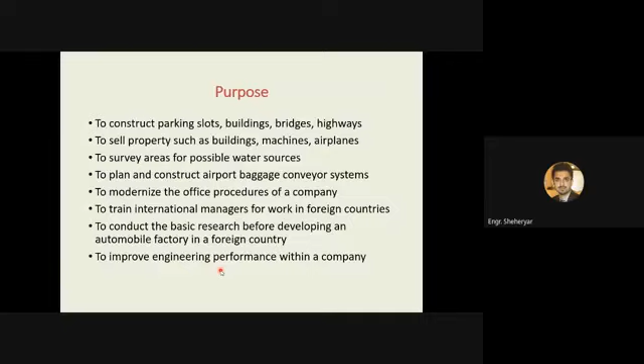Is Majid Yasir a foreigner or Pakistani? Is anyone here or not? Yes sir, yes sir. I have a question, are you in the university? No, I'm not in the university. I'm asking if Majid Yasir is a foreigner or local student. Yeah, yes, he's a foreigner. Okay, please tell him to join the class with university official ID. Okay.

So, is there any question till this point? No, sir, because I just joined now, I have no internet in hostel, okay, university. Okay, so we are talking about the technical proposals.

We have just introduced into the topic. I'm asking about the importance of a proposal for a company. So Ahmed Mohammed, do you know anything or have any idea why a technical proposal is important for a company or an organization?

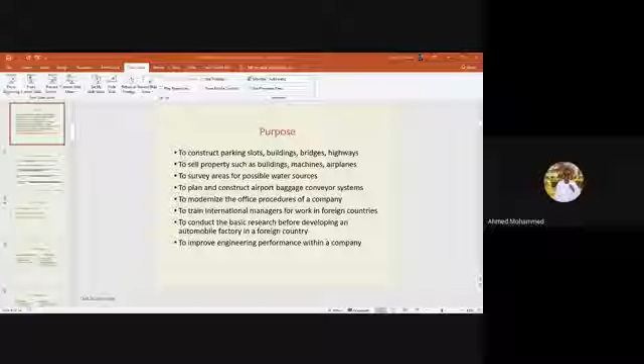Technical proposal for a project or something like that? Yes. Yes, it's very important because if the company wants to do a proposal for any project, it gives the funds - if there is an organization funding that project, the proposal can give a clear idea about what will go, what will be, and how it will be.

Yes, good. Anyone else? Yes sir, please. Sir, I think it's a basic step for approving anything or any idea that we are proposing in front of the companies, etc. So it's an important step, I think.

Yes, exactly. And it will lead either to rejection of the proposal, or it will lead to acceptance of the proposal. In both cases, it is beneficial for our company. If it is rejected, you can learn from your mistakes, and if it is accepted, it will earn money for your company.

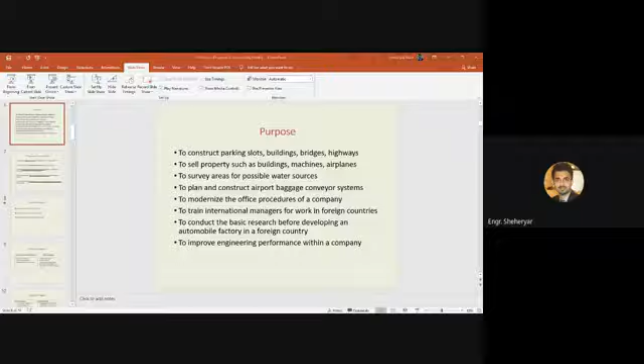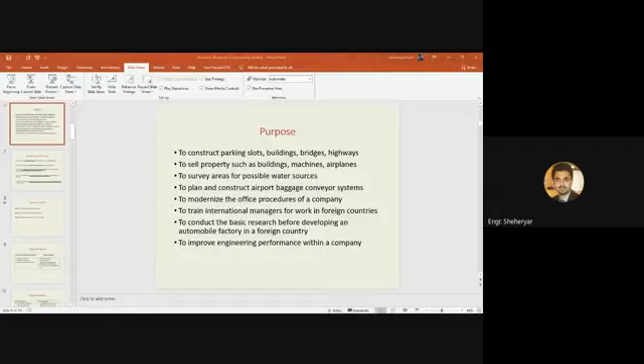A successful proposal - there's a quote that says a successful proposal is the difference between working on a project or looking for another job. So if your proposal is successful, you'll be working on that project, or if your proposal is rejected, you'll be looking for another job.

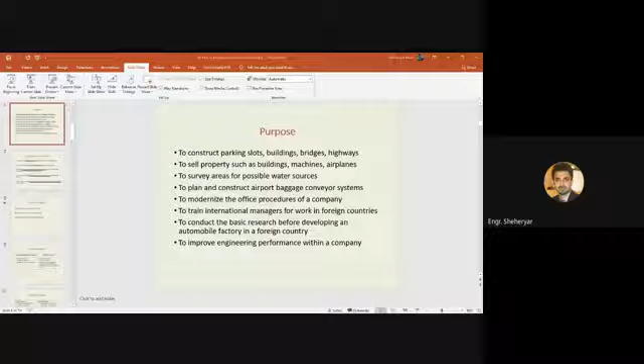When you write a technical proposal, for example, if there is a project announced for construction of a canal system, your company is trying to apply for that project, and for this purpose they are writing a proposal. So, what will be the steps of writing a proposal?

They cannot directly sit down and write a proposal saying we want to do this project, and complete the proposal within a day or two. You have to do some surveys. You have to do some research activities. You have to find out how the canal systems are built.

If you have not done a similar project in the past, you have to search out the procedure, search out for the materials required, search out the rates of the materials which will be used in construction. You have to find out local labor cost, labor skills required, machinery required, and so on. The list is endless.

सर, ये केस अगर आप देखें तो नीचे वाली स्लैब का एरिया ज्यादा है और ऊपर वाले का कम है. तो इस सिचुएशन में अगर फील्ड में ये प्रोजेक्ट हमारे पास आ जाए तो हम इस केस में क्या करें, क्योंकि ऊपर वाली स्लैब छोटी है नीचे वाली बड़ी है.

ऊपर वाली को सपोर्ट भी तो ऐसे ही करेंगे ना, या इसका कोई अल्टरनेट मेथड है सपोर्ट करने का? नहीं, तो इसका जो स्ट्रक्चर डिजाइनर था उसने गलती की है. जो स्ट्रक्चर डिजाइनर था, ये कॉलम इधर आते ही नहीं, ऊपर वाले स्लैब को बड़ा कर दे, क्या हो जाएगा? सर वो आर्किटेक्चर, वो टेरिस नीचे देना हो तो फिर

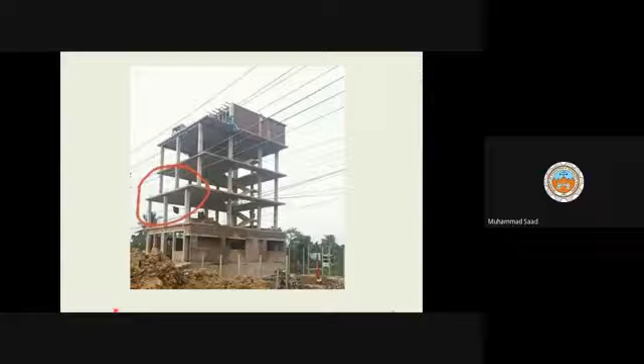टेरेस नीचे देना हो तो फिर आप ये कर सकते हैं कि इसके नीचे एटलीस्ट बीम तो प्रोवाइड कर देते, जहाँ पे स्लैब रेस्ट कर रहा है, कॉलम जिस स्लैब के ऊपर रेस्ट कर रहा है, ये जगह, इसको हम अगर कॉलम के ऊपर कॉलम देकर, आर्किटेक्चरल पर्पस के लिए बीम रख देते फिर भी डिजाइन आ सकता था सर।

तो मैं यही कह रहा हूँ कि यहाँ से यहाँ तक अगर बीम दे देते, properly designed beam for this load, then it was okay. सर बीम की जरूरत नहीं थी, जो 3 कॉलम्स बाहर हैं उनको इनसाइड कर लेते, सिर्फ बाहर का ओवरहैंगिंग पोर्शन। वो पिछला जो क्वेश्चन था वो कह रहा था कि we have to stick with this shape कि यहाँ से स्ट्रक्चर पीछे चला जाए।

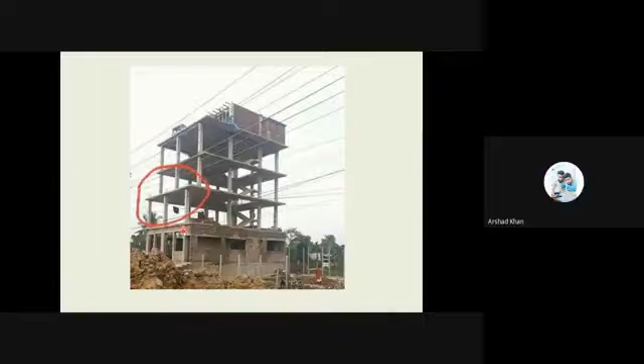Otherwise that was the simplest solution कि आप इन सबको एक लाइन में ले आए, इसको बाहर ले आए इसको पीछे ले जाए। सर ने बीम नहीं प्रोवाइड किया ना, जो सबसे बड़ी गलती की। बीम होते तो फिर ठीक था। बिल्कुल।

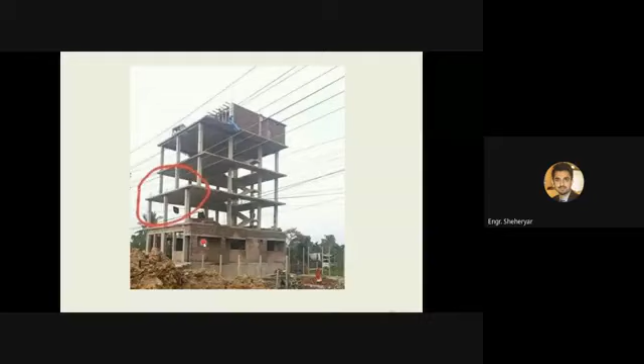What is this? AutoCAD पढ़ा है सब में?

यस सर। Ahmed, Mohammed, can you point out the issue with this slab? रिवीजन क्लाउड को भी स्लैब में उन्होंने पुट कर दिया। Ahmed, yeah Mohammed, there is an opening within the slab, so it is affecting transmission of the load, there is an opening within the slab.

Okay, yes, there is an opening within the slab, but look at this drawing and then look at this opening. What does this bubble-shaped line mean?

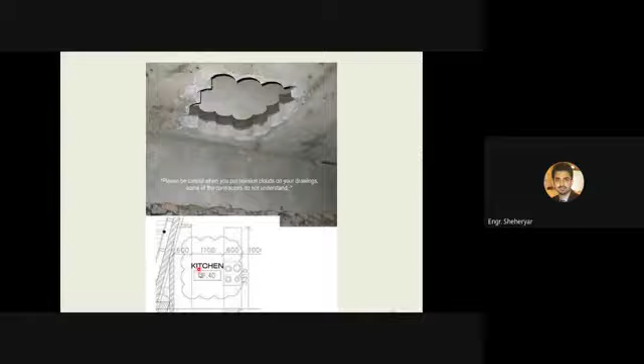Actually, it is not something like a revision cloud. It is a revision cloud. It is a symbolic line. The designer may have had any issue with this text or their dimensions, and he highlighted this portion to indicate that you have to revise these dimensions or this area. So therefore this thing is present here.

But the site engineer, they have constructed this exactly same thing in the slab. So this was the mistake. By the way, it is looking good, sir.

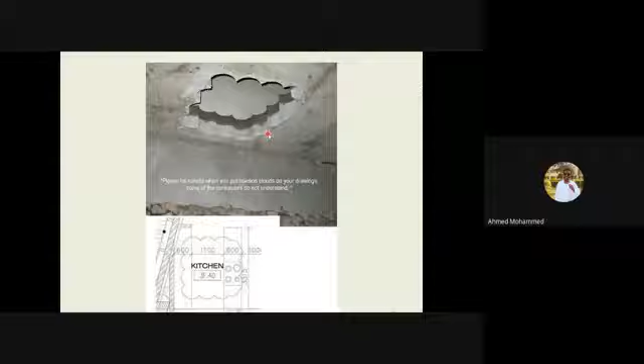हाँ, लेकिन अगर ऊपर किराए का घर हो नीचे आपका घर हो तो फिर अच्छा होगा, और भी अच्छा होगा। That's real or just made for understanding? No, that is real, that is real. सलाम दुआ तो करेंगे ना सर ऊपर। हाँ सलाम दुआ करेंगे।

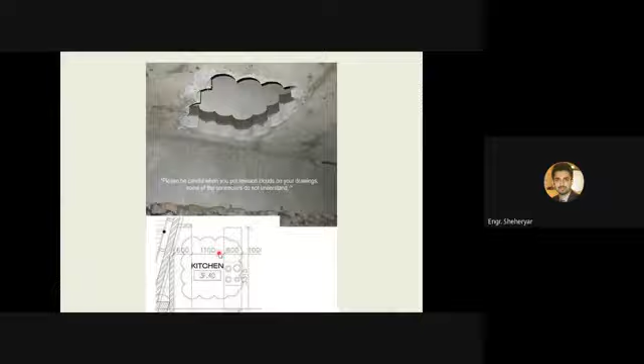अच्छा, now let's get back to the topic. I will discuss the elements of structure. So as we all know, one size cannot be fitted on all. आपका एक बंदे का सूट जो है दूसरे बंदे पे नहीं आता, एक साइज सब पे फिट नहीं होता. Single size doesn't fit all the people. So same is the case here. A single style of writing proposal doesn't fit with all type of proposals.

Some will need additional headings for providing the details required for that specific project. So each type of project will involve different types of headings in writing the proposal. So what are the main headings of writing a proposal? The main headings can be divided into three parts: prefatory parts, body of proposal, and supplementary parts.

There are basic three parts of a proposal document. Number one is the prefatory part, second one is the body of proposal, and third one is the supplementary parts. Each of them have their sub parts as well.

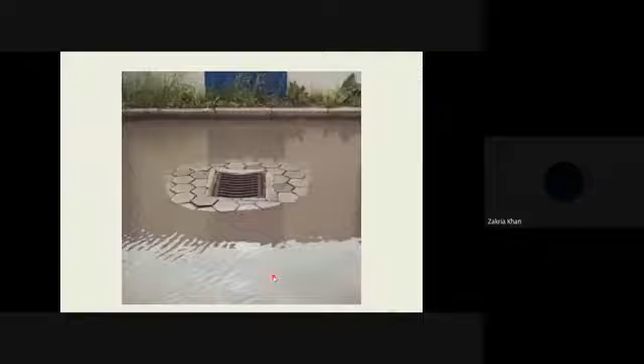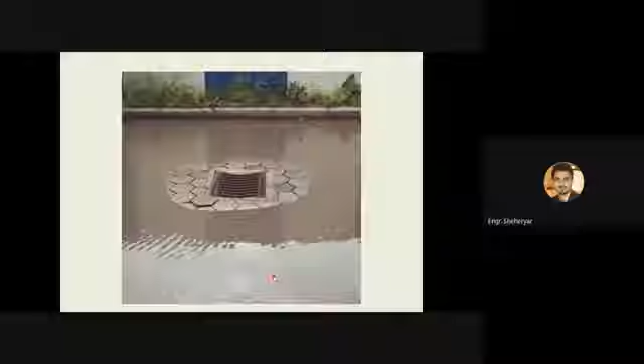It is actually in the wrong position because it's in the middle of the road.

No, actually it is not. The problem is not like this. It might be in the correct position, but the level of the drain is higher than the surrounding surface. So the water will have to fight with the force of gravity and climb up to get down in the drain. You got my point?

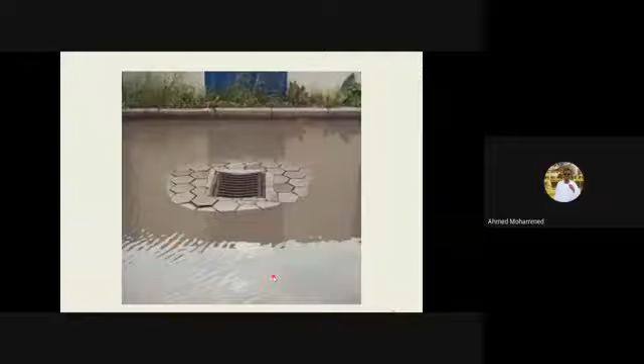Yes, sir. It also could be like for jobless people, in order to give them a job. So you have to make this, and then they will come to work. It is a positive aspect of this. Wow, good.

Okay, now let's discuss the body of proposal. The body will contain the problem for which you are writing the proposal, background, then purpose, then scope, limitations, project team personnel, procedures, equipment, facilities, and products, and personnel qualifications, etc. Budget, cost estimate.

So, body of proposal. In the body of proposal, initially you will discuss, depending upon the needs of the solicitor, the problem statement will contain the information about the problem. For example, if you are writing a proposal to solve the congestion problem at Phase 3 chowk, so you'll write

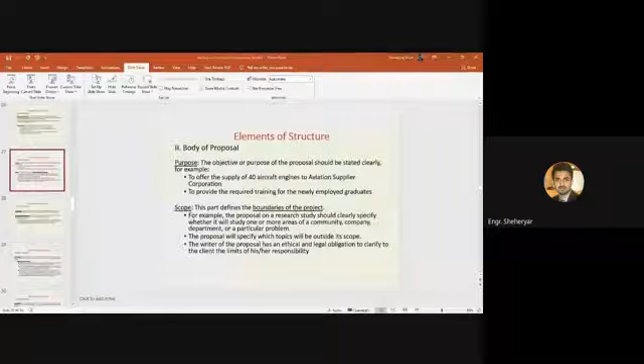So we're so curious to know. If you have any idea, you can please share your idea. Maybe it's wrong, but I'll be interested, sir, in this problem.

Scope basically describes the extent of the project, and limitations. In limitation, we can study the shortcomings that we may face in the project. Okay, good attempt.

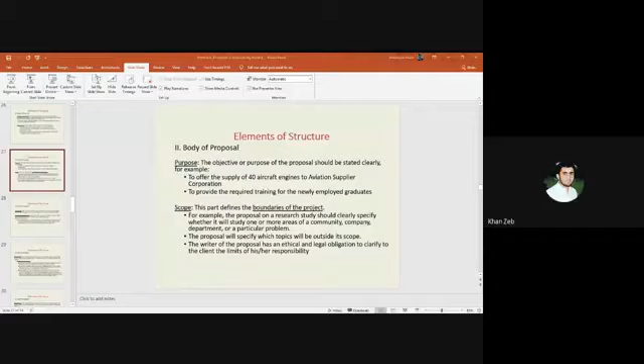Scope is clear to all of you.

Talking about the limitations. Limitations are something like, how to explain this, let me give you an example. I've worked on my MSc research which was on numerical modeling. Numerical modeling is like you use mathematical techniques to predict any physical phenomena. For example, if a beam is constructed and it was tested experimentally, it costed you almost 3 to 4 lakh rupees.

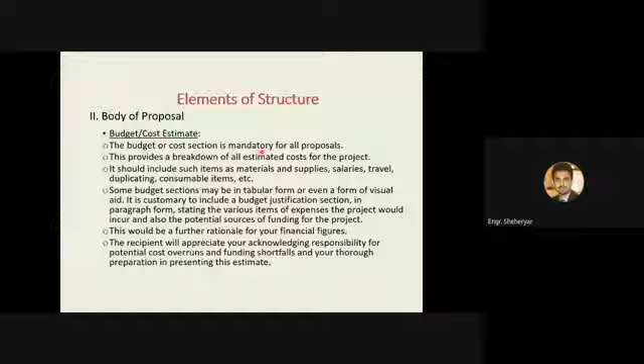For example, if you are presenting detailed calculation about cost, you'll mention in the body of the proposal that the detailed calculation of the cost is presented in Appendix A. So the reader will directly go to Appendix A to read the detail about the calculation, and when they open Appendix A, they will find the detailed calculation.

Also, if there is some structural analysis calculation involved in the research proposal, in the body of the proposal you will just provide the results of the analysis, and mention that the detailed calculation is presented in Appendix B. If the reader wants to read the detailed calculation, they will directly go to Appendix B and read it. So, is it clear?

Yes, sir. Okay, references.

Every time you quote something in the body of the proposal—for example, if you're working on concrete and writing in the introduction or any part of the body of the proposal that the concrete strength will decrease if we cure it with acidic water, or something like this—how did you know that? How did you know that?

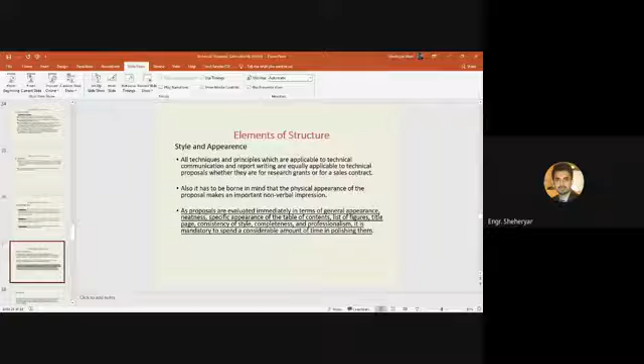Style and appearance of research proposal is very important. You must stick to a single style. If the proposal is an invited proposal, then you must stick to the template provided by the solicitor. And if it is an uninvited proposal and you are using your own format, then you must stick to a single format. Your text size should be uniform, and your font style should be uniform.

It should not be like this: one paragraph is in Times New Roman, and the other paragraph is in Calibri font, and the first paragraph is size 12 and the second paragraph is size 14. Some headings are bold, some are italic, some are underlined. So your style should be uniform.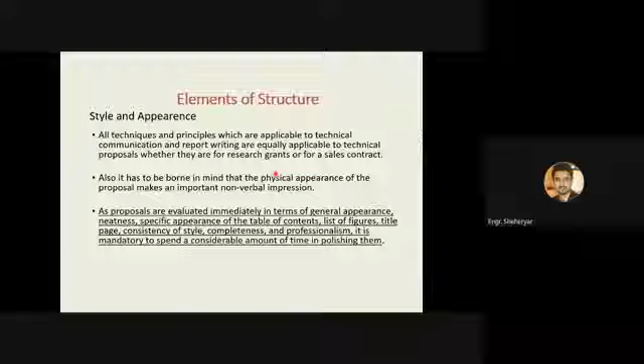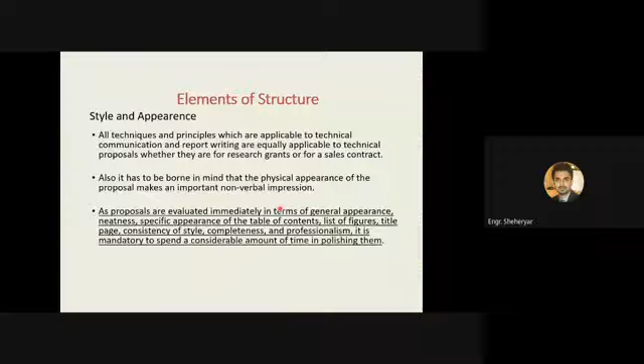Evaluation of the proposals: if you know in advance the evaluation criteria of the proposal, you might be able to prepare it in a more efficient way. For example, you know in advance that you will be assessed based on 50% of final exam, 20% of the mid exam, and 30% of the sessionals. So for the final exam you work hard, because it has more weightage.

So in the same manner, if you know in advance, in the solicited proposals the solicitor in most cases gives you the evaluation criteria, that your methodology will be having this much marks, and your problem statement or research literature review will be having this much marks. So if you know this, you can prepare the research proposal or any proposal in a more efficient way.

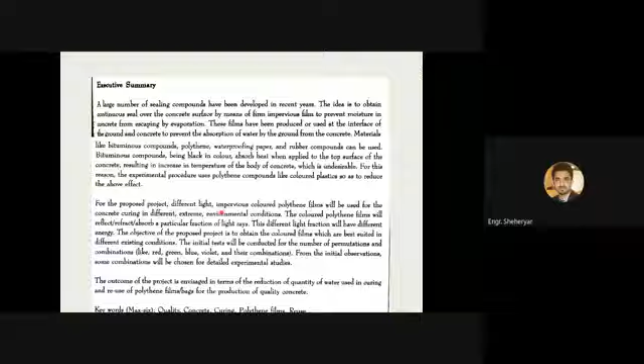Look at the second paragraph: 'For the proposed project,' now look at the statement - this is the methodology. For the proposed project, different light impervious colored polythene films will be used for the concrete curing in different extreme environmental conditions.

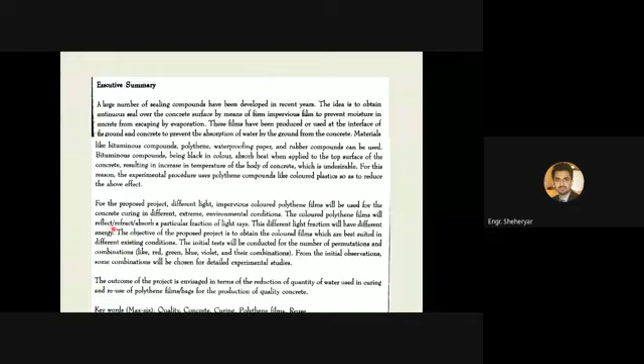The colored polythene films will reflect and absorb a particular fraction of light rays. The different light fractions will have different energy. The objective of the proposed project is to obtain the colored films which are best suited to the different existing conditions. The initial test will be conducted for a number of permutations and combinations and so on. This was about the objective and procedure.

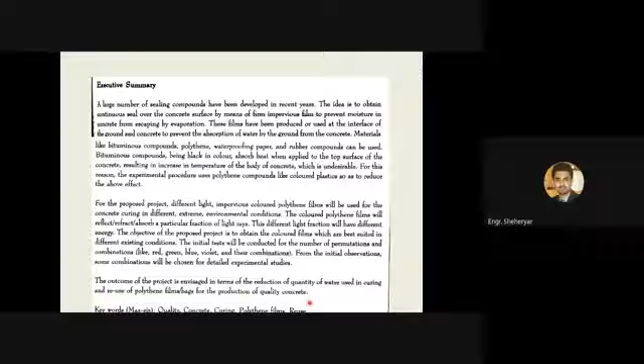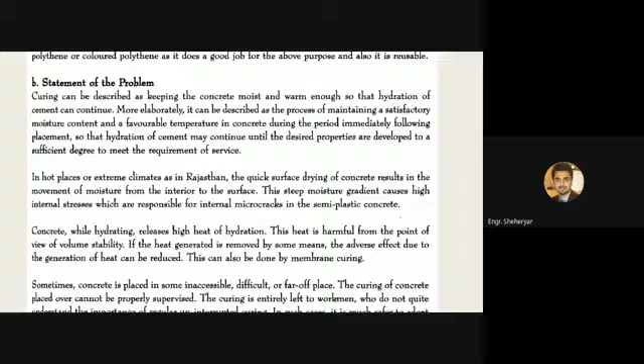In hot places or extreme climates, the quick surface drying of concrete results in the movement of moisture from the interior to the surface. This steep moisture gradient causes high internal stresses which are responsible for internal microcracks in the semi-plastic concrete. So this is the problem. Concrete, while hydrating, releases high heat of hydration - this is the discussion about the problem.

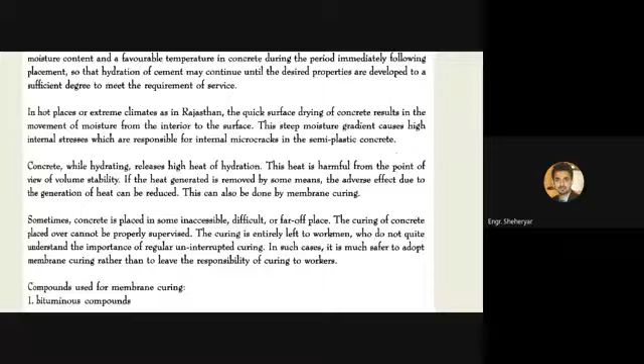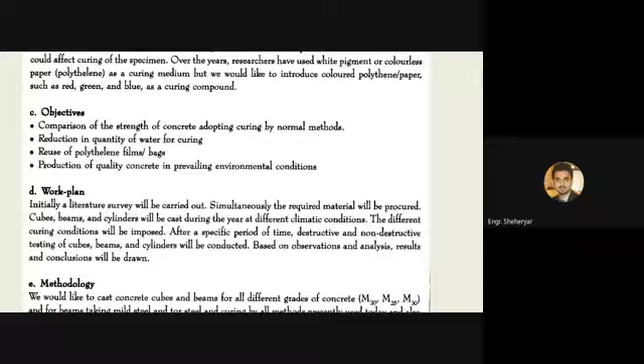Reduction in quantity of water for curing - if they are using any special technique, what will be the reduction in use of water for curing? Reuse of polythene film bags. Production of quality concrete in prevailing environmental conditions. These are the objectives. This is the work plan.

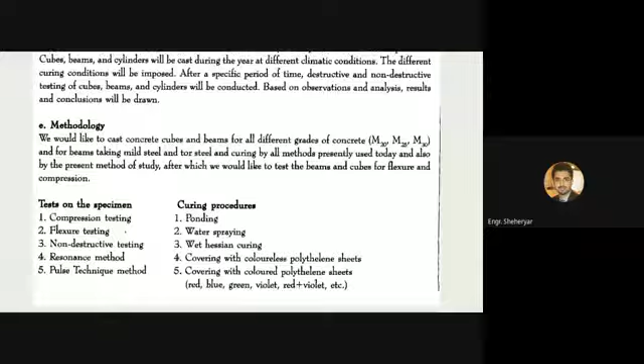Methodology - this is the methodology. The methodology will contain all the tests included in this project. They will perform compression tests, flexure tests, non-destructive testing, resonance method, and curing procedures they will use: ponding, water spraying, wet Hessian curing, covering with colorless polythene sheets, covering with colored polythene sheets, and so on.

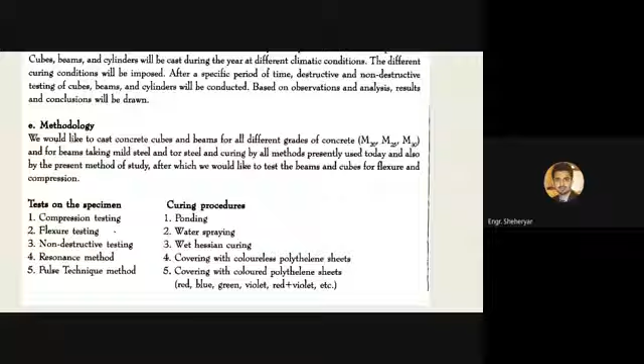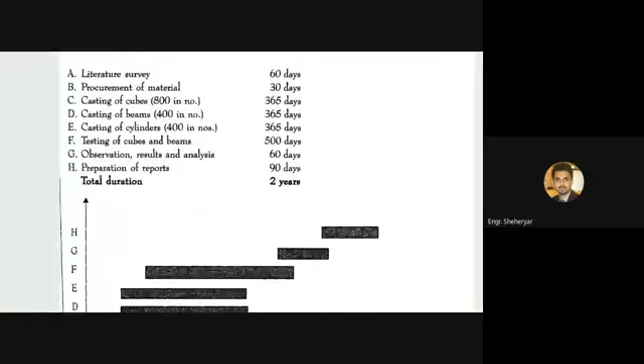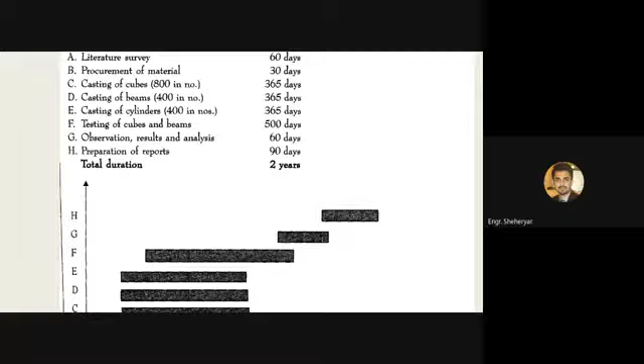This is the time schedule or Gantt chart. You may have heard of the Gantt chart, which is built in MS Project. This shows diagrammatically the duration of each activity and the sequence of each activity to scale. For example, activity A has this much duration, and activity B will have this much duration. Activity B will start after activity A ends, and then these activities will start and have this much duration.

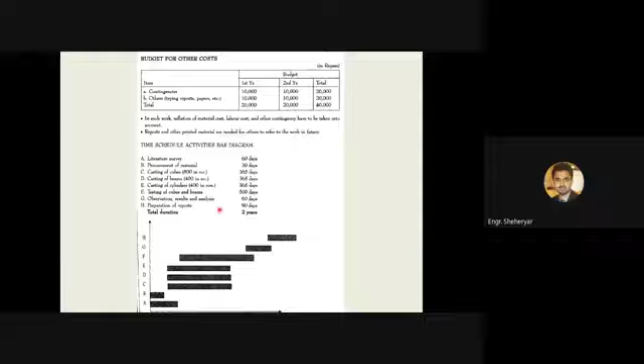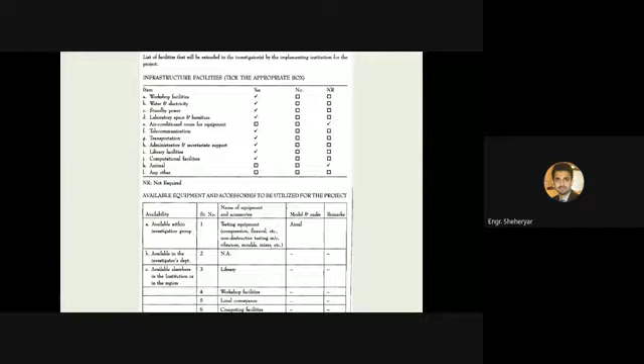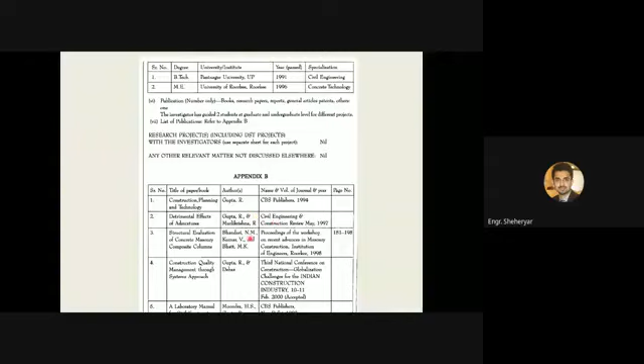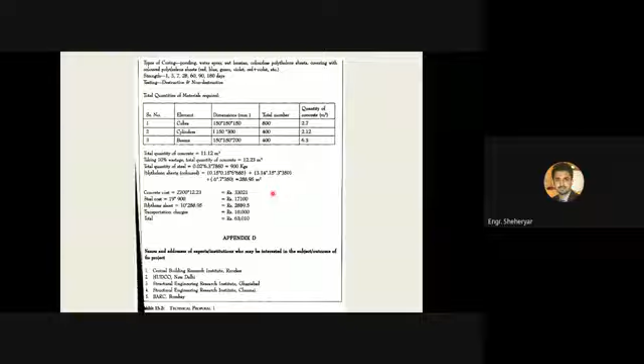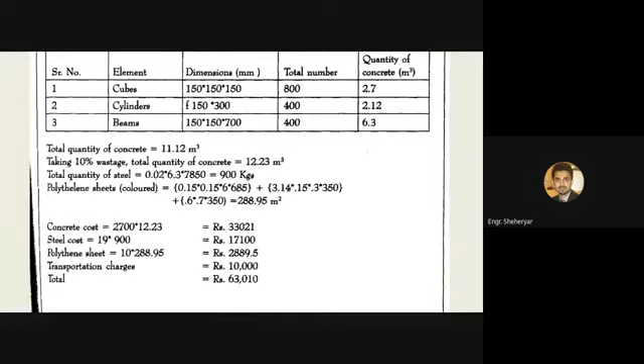In Appendix B, they have presented the list of publications of this author. Appendix C shows you the cost estimates in detail. They have calculated how much concrete will be required, the dimensions of the cubes, total number of specimens required, total amount of concrete required, and how much that concrete will cost, how much the polythene sheets will cost. So this is the total cost, the details of the cost estimates.

So this was all about the technical proposals. We can conclude this lecture at this point. If you have any question, you can ask, please.

Sir? In the second page of this sample proposal, there is a birthday mentioned there. What is the business of the birthday with this proposal?